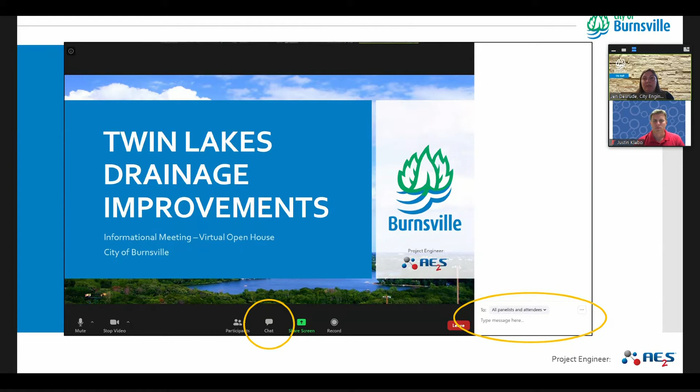So I'll start off with a little history. Again, my name is Jen Desrude. I'm the city engineer for Burnsville. This process began about 1.5 years ago when the city started a citywide stormwater system modeling and analysis study.

The study was broken into 3 components. First, we updated our storm sewer system model for the whole city. And then we evaluated the highest flood risk areas and potential improvements. And then the last thing was a chain of lakes review of lake levels from Keller Lake to the Minnesota River. For many years, the city has heard concerns with lake levels on Crystal Lake and South Twin Lake.

And recently we've heard concerns with a new development occurring north of South Cross and the implications of that development on our water bodies. This improvement project addresses those concerns. And in a minute, I'll ask Justin to review the details. But before he does, I wanted to note that the funding for this project comes from the Stormwater Utility Fund. Additionally, the developer north of South Cross is contributing. There will be no special assessments used to pay for the project. So that's a little bit on the funding.

And now I'll turn it over to Justin Klabo. He's our consultant project manager from AE2S. Thank you very much, Jen. I'm happy to be in front of you today to give you a little more background on the project and walk you through where we're at today, and really here to hear from you as the public and the residents any concerns or questions you might have.

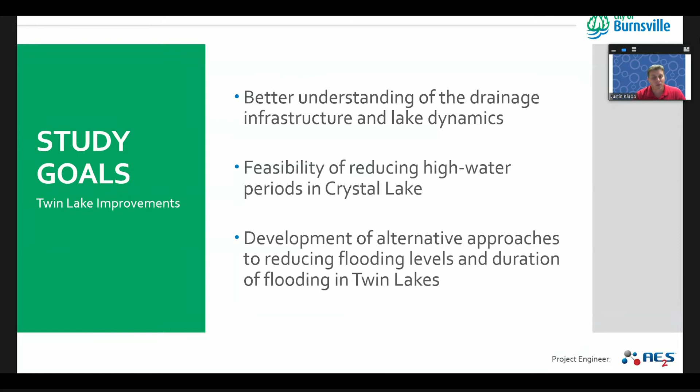And then the other part of that is the Twin Lake system. Something that we heard was the development of alternative approaches to reduce not only the level, but also the duration of flooding within the Twin Lake system. So as we get into it, where are we today? I put this little timeline back up there. We're right at the beginning.

So the graphics you're going to see right now are the initial graphics we've prepared just to give some concept level idea of what we're looking to do. So we're starting that preliminary engineering phase, reaching out to you to understand different input. And then from there, like Jen pointed out, we were looking at doing a final design and ultimate construction if it's selected that we want to move forward with that.

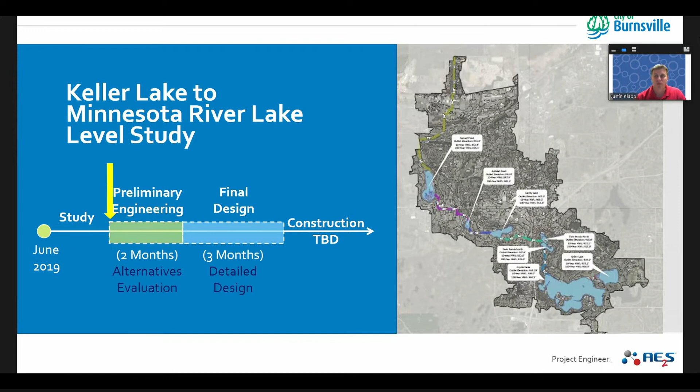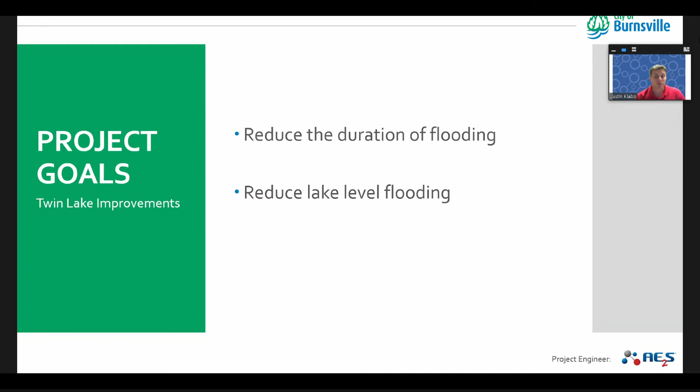So the project goals currently, the biggest things that came out of the study phase, were to reduce the duration of flooding and reduce the lake level flooding experienced within the immediate chain of lakes. We're looking at Crystal Lake, South Twin, North Twin, and the regional pond. So those 4 water bodies within that area east of 35E, as you all know better than myself.

So the first location we're looking at improving is the Crystal Lake outlet modifications. Looking at the outlet structure itself, trying to improve the amount of discharge that we can have through the lake to really reduce that drawdown period. Any resident living around Crystal Lake or in the vicinity of Burnsville understands that lake takes a long time to drain down, which means that there's less storage available if you were to get another rainfall event to help attenuate flows downstream.

Now, when you move to South Twin, well, with South Twin, it is a flashy lake. It's a lot smaller than Crystal Lake, and has a lot of storm sewer systems that go to it. And so with that, there's the period that you experience a high water level condition. So you want to move that water out of there as quickly as possible. And so we're looking at improving that by providing a new outlet control structure and discharge pipe independent of the pipe that currently exists, and I'll show you here in a minute.

And then the regional pond expansion. You might wonder, well, it's not immediately within North Twin or South Twin, but it does feed and take a lot of runoff from the northerly areas. And with that, we're looking at different ways we can provide additional storage within an area that's currently undeveloped, but also provide some potential water quality benefits if we can integrate that into the project.

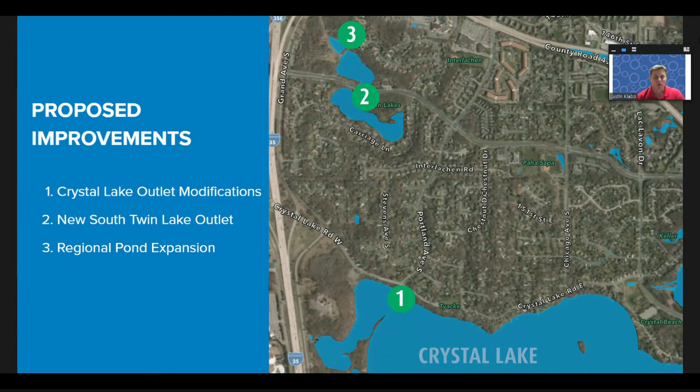So as you look at this, just to wrap up exactly what we're trying to achieve at these 3 different locations: like I said, the lake drawdown time reduction for Crystal Lake specifically, and then within the South Twin, North Twin regional pond complex, it's the combination of not only drawdown, but high water level reduction. Because in this system, everything flows from Crystal Lake into South Twin, then into North Twin, and then ultimately out of the system, and then west across 35E underneath Southcross. So that's ultimately how this overall system works together.

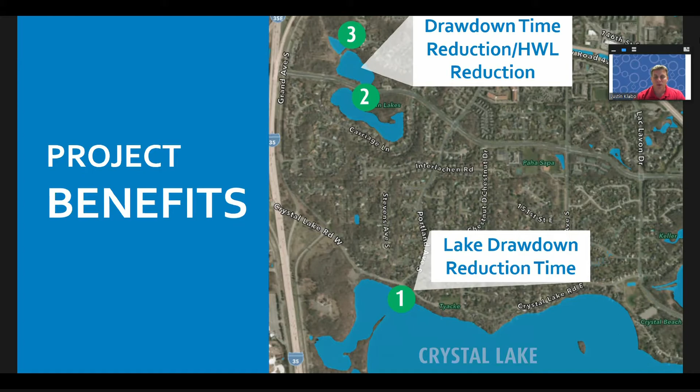So we'll look individually, one at a time, at what these improvements entail. As you might notice here with this plan sheet, we're looking at improving the outlet control structure specifically on Crystal Lake. The work would be comprised of just an area around Crystal Lake itself. As far as timing goes for these 3 projects, we'd be looking at doing Crystal Lake in the fall. The reason for that is Crystal Lake is a heavily utilized water body, and for access purposes, constructability, and other things for a contractor.

We're looking at utilizing a portion of the parking lot for some staging of equipment, nothing that would be reconstructed, but simply materials, vehicles, and things like that, to allow a contractor to easily access the outlet control structure. Because the parking lot's used extensively during boating season, we're looking at doing that project next fall after Labor Day to limit the disturbance to that area. For Crystal Lake, you have the graph here on the bottom of the screen.

Why are we doing this? The idea is we're trying to increase the discharge from the lake. And by increasing the discharge, we can see over a 30% reduction in the time it takes from that high water level condition to get back down to a normal water condition, or a no-wake condition. And you might ask, what does 30% mean? I'm talking 7 to 8 days quicker. It takes a long time for Crystal Lake to draw down when you have these really large rain events with a water level over the no-wake condition. So that's a substantial amount of time reduced to help alleviate the no-wake condition.

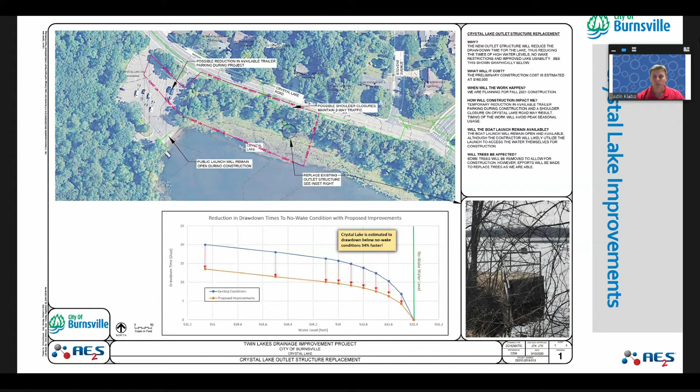And so this helps do 2 things. It helps reduce the high water levels, and it also helps reduce the drawdown period. As I mentioned on Crystal Lake, we've had back-to-back rainfall events where you might get a couple inches one day and then 3 days later 4 inches. If we're able to get those water bodies drawn down quicker, we're less susceptible to high water level conditions, because it creates more volume in these lakes and ponds for storage to temporarily hold that water before it's able to discharge out.

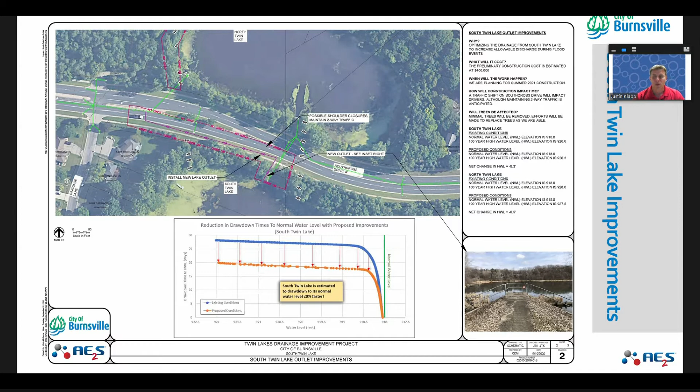Ultimately, looking at Southcross would maintain two-way traffic. It would just be shifted to the westbound lanes, excuse me, just on the north side of the roadway with single lane head-to-head traffic with some construction cones. So as we move then and continue to go north, we're looking at the regional pond expansion.

So the regional pond expansion is trying to serve a few different things. One of the biggest things here is to provide additional storage, and really the benefit, the drawdown, of South Twin to hold back more water, and also North Twin. So that way that water with the new outlet control structure we're putting in South Twin can simply drain out. And the idea here is that we can hold back additional water within the regional pond, so that any water coming in from the large storm sewer systems to the north can hold back slowly, then discharge into North Twin and reduce high water level conditions and also flooding.

One of the things we're exploring with this option is also rerouting a storm sewer system that's located in the northeast area, trying to bypass water to maximize the benefit that we can. Also looking at providing a larger berm and raising the berm up to hold back more water.

With this project, this is a heavily treed area. What we're looking at doing to maintain an adequate buffer is to hold off on grading all the way up to the property line of the residents that are located off the cul-de-sac and to the north, providing an undisturbed buffer between where our grading stops. And that way the trees and everything in between that and the property line can maintain a visual buffer between existing residents and the new construction down the hill.

One of the other things we are also exploring for this area is trying to expand the permanent pool of the actual pond itself. If we can expand the volume of that permanent pool, that'll help provide some additional water quality benefits for the downstream receiving waters and ultimately for the overall system.

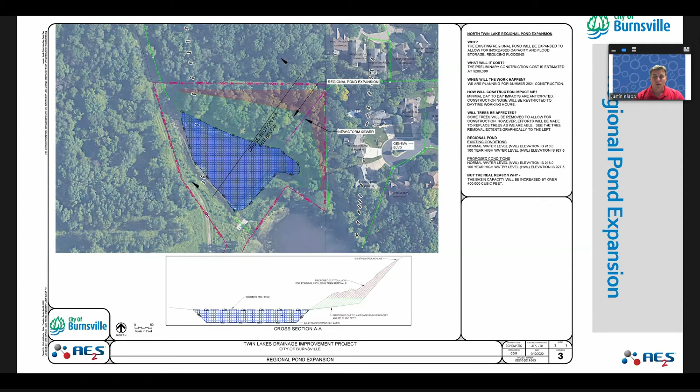And with that, I'll turn it over to Jen and she can walk you through some additional information on the project. Thanks, Justin. So before we get to questions, I wanted to let you know how you can get updates or provide comments.